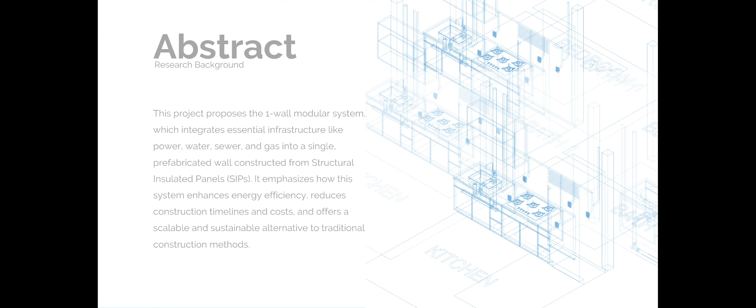Research motivation: the construction industry faces challenges related to extended project durations, high labor costs, and significant environmental impacts. This research investigates the potential of a single wall modular system, which integrates all critical utilities into a single prefabricated element, enhancing construction efficiency, reducing costs, and minimizing the environmental footprint of building and construction.

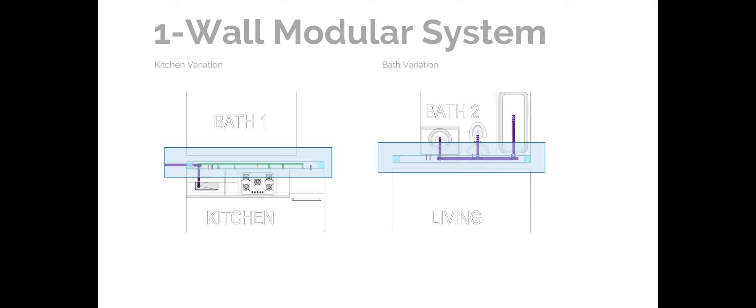Here's an overview of the one-wall system and its variations. Primarily, the one-wall system is broken up into a kitchen variation and a bath variation. Each system contains all of the critical infrastructure for either the kitchen or the bath to work as an isolated unit and be produced as such.

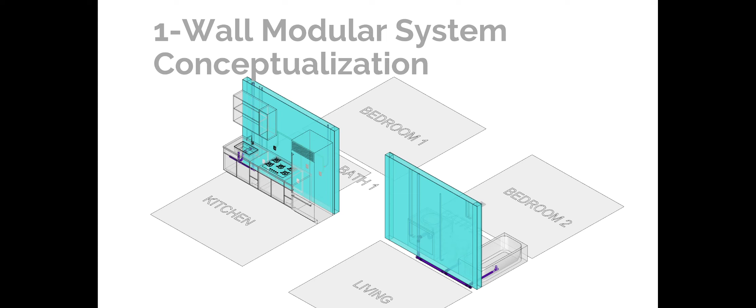For the conceptualization, here's a 3D view of the one-wall modular system. As you can see, the layouts have all of the sewage, water line connections, gas connections, as well as electrical conduit for outlets and appliance and fixture connections.

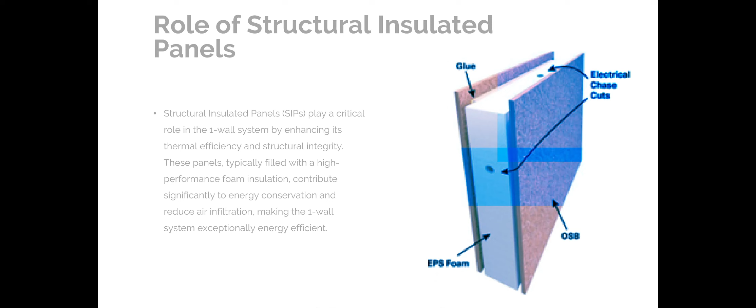SIPs was chosen as the material to build the one-wall system. Structural insulated panels play a critical role in the one-wall system by enhancing its thermal efficiency and structural integrity. These panels, typically filled with high-performance foam insulation, contribute significantly to energy conservation and reduce air infiltration, making the one-wall system exceptionally energy efficient.

During manufacturing, the one-wall system's infrastructure, comprising electrical, plumbing, and mechanical systems, is meticulously integrated into the SIPs. This integration occurs in a controlled environment where the structural frame is first assembled, followed by the installation of infrastructure elements.

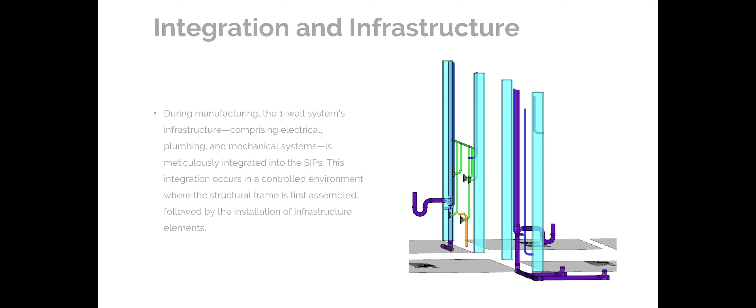To demonstrate the flexibility of the single wall system, I've designed a couple of examples which show its various applications. The one-wall system's application in a studio unit exemplifies its fundamental efficiency, integrating all essential services within a single wall to maximize the use of limited space.

This model demonstrates how the system can effectively support smaller residential formats by simplifying construction processes and reducing material usage. The streamlined approach offers potential cost savings and faster completion times, ideal for urban settings where space and time are at a premium.

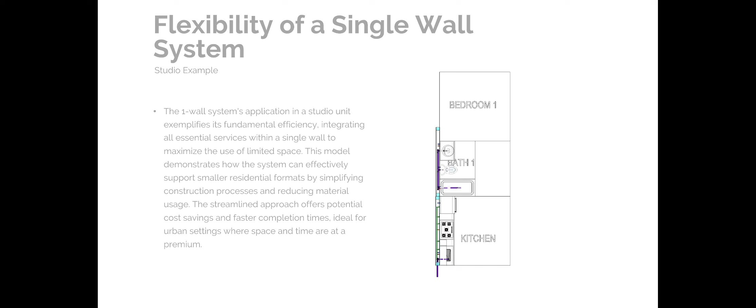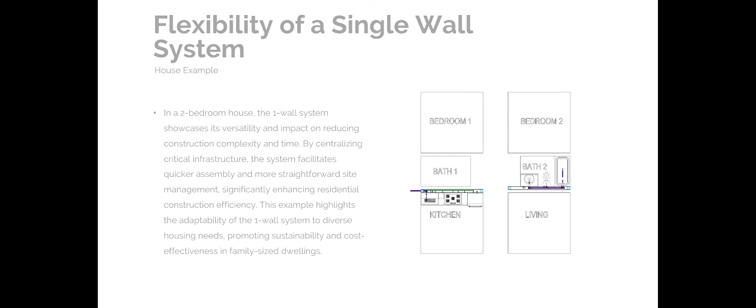In this example, I placed the one-wall systems on the interior walls, independent of the exterior walls. This is a technique that could be implemented if the system were to go into production, where the exterior walls could be framed up independently and the one wall system could be installed during the framing process, further speeding up the production schedule, as typically the exterior walls are the weight-bearing walls of single-family dwellings. This would be perfect for the one wall system to be implemented.

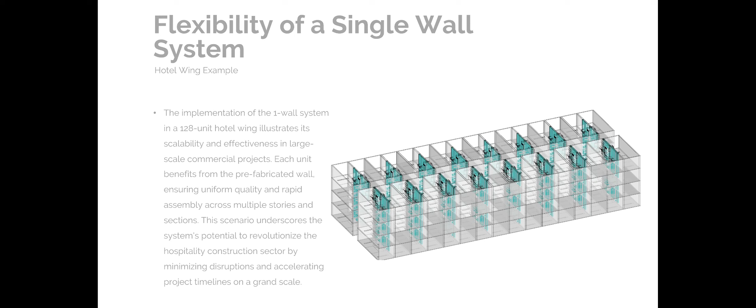As you can see in the example, all of the one wall system elements for the kitchen and bath are next to each other and stacked up on one another, reducing the plumbing runs and electrical runs required to accomplish a project like this, saving money and time in the long run.

The construction efficiency analysis was conducted to really analyze if there was any construction schedule time savings by implementing the one wall system. In this example, the traditional construction schedule for a typical two-bedroom, two-bath unit spans 26 days, involving sequential stages of framing, utility installations, and finishing. This extended timeline reflects the need for coordinating multiple trades and managing various on-site activities, often leading to inefficiencies and increased labor costs.

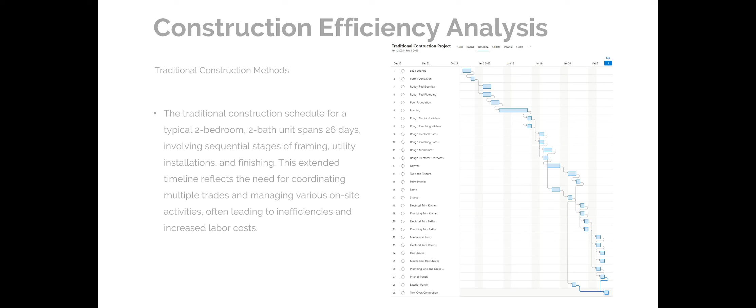In the single wall modular method example, utilizing the one wall system reduces the construction schedule to 23 days instead of 26 days by integrating essential utilities into prefabricated panels, allowing simultaneous progress in multiple construction phases. This streamlined approach not only speeds up the entire building process, but also minimizes the dependency on multiple subcontractors, leading to significant time and cost savings.

In this example, savings are seen not only on the installation portion of the kitchen and bath systems, but also on the back end, on the trim outs, where all of the trim locations are already pre-established and pre-coordinated during the design phase of the one wall system before it ever gets out to the site. This minimizes any potential issues or rework that often needs to happen on construction sites.

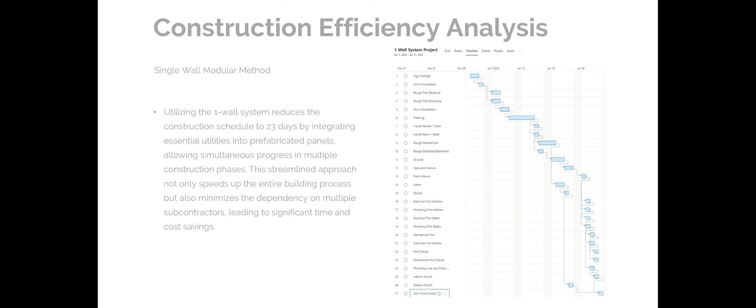The efficiency analysis yielded an 11.5% schedule reduction, which is significant considering the slight change was just introducing a pre-built portion of the building and not the entire building.

In conclusion, the one wall modular system exemplifies a significant advancement in construction technology by integrating essential infrastructures into a single prefabricated wall. This system, built using structural insulated panels, not only enhances energy efficiency, but also optimizes construction timelines and reduces labor costs.

The economic, environmental, and operational benefits discussed underline its potential to streamline building processes across various sectors, including residential and hospitality, where repetitive designs are common. By offering a scalable, efficient, and sustainable alternative to traditional methods, the one wall system holds the promise of transforming the construction industry, advocating for broader adoption and continued innovation in modular construction techniques.